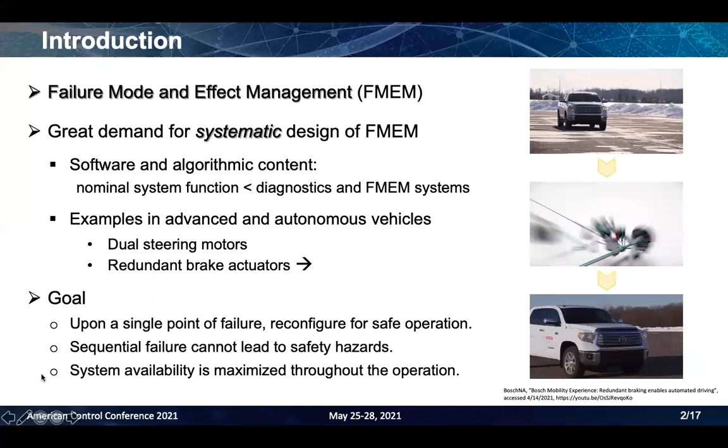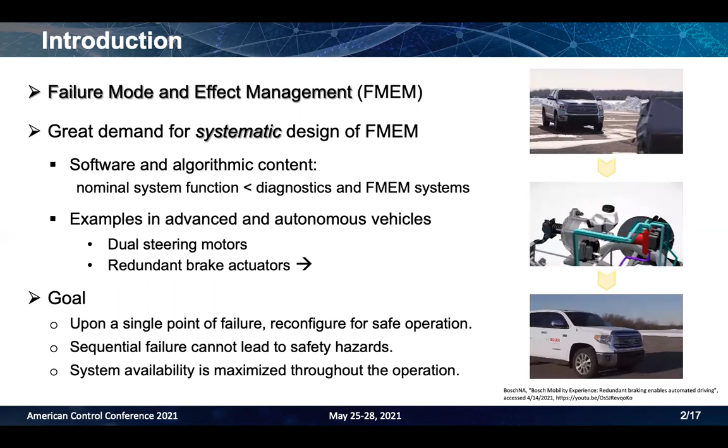The title of our presentation today is A Failure Mode Reconfiguration Strategy Based on Constraint Admissible and Recoverable Sets. Our study focused on the design of failure mode and effect management systems for industrial applications. There's great demand for systematic design approaches in this area, as the software and algorithmic content for diagnostics and the FMEM system is often larger than what is responsible for the nominal system function.

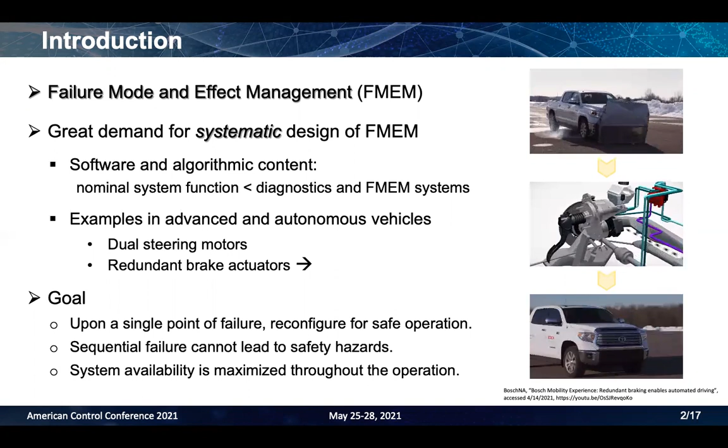This is notably the case in the area of advanced and autonomous vehicles, where redundant actuation is often employed to enable safe operation in case of failures. Examples include having dual steering motors and the use of redundant brake actuators, as shown by these videos. So our goal for the design of the FMEM system is that in case of a single point of failure, the system operation can be reconfigured so that in a new mode, another single point of failure cannot lead to safety hazards, and at the same time, we're maximizing the system availability.

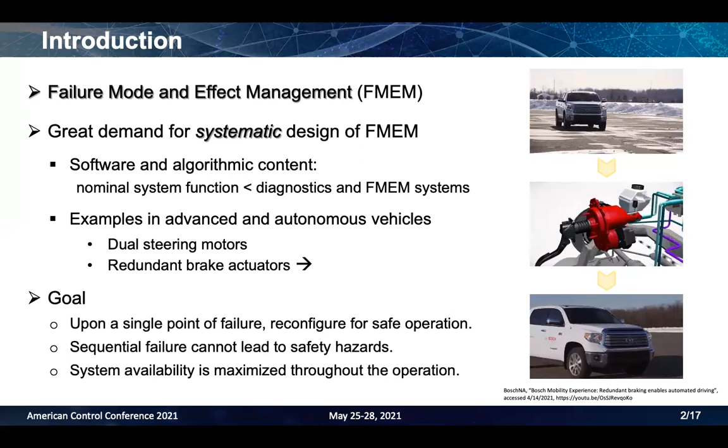Systematic recoverability analysis has been addressed in previous literature, but the existing methods typically do not handle state and control constraints. Set theoretic control methods have been used to handle constraints, so our approach builds on the idea of using constraint admissible and recoverable sets while extending it to cases with multiple failure modes and sequential mode transitions.

We consider failures caused by an actuator being zeroed out, and the goal is to guarantee safe operation and reconfiguration of the system, which means to avoid the violation of state and control constraints at all times. Last but not least, our approach includes the important feature of reference tracking while maintaining the safe operation of the system by using the reference governor.

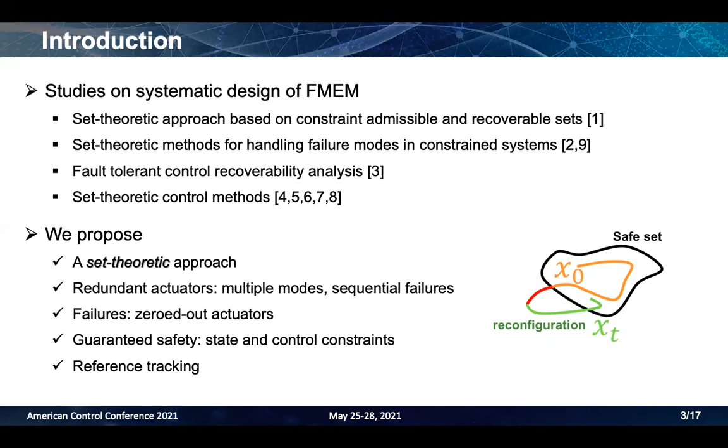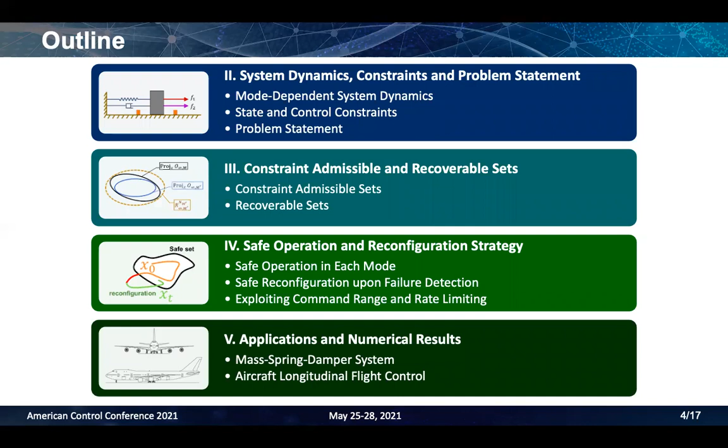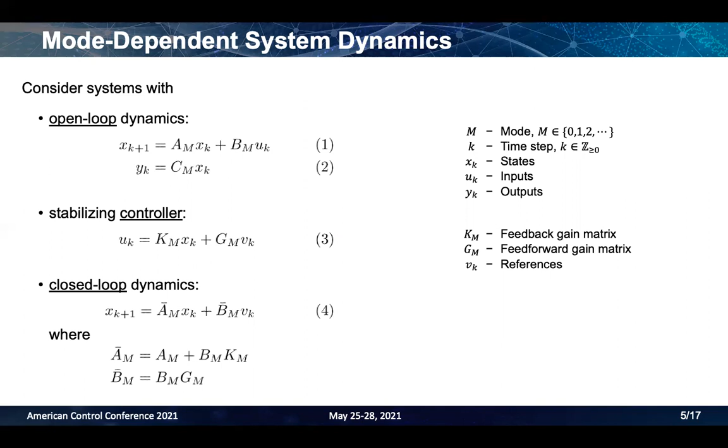The set of point-wise in time state constraints are given in equation 5 as a finite set of inequalities, which represent state and control constraints, as well as actuator range and rate limits. Modifications to these constraints are considered to facilitate the subsequent design of our failure mode reconfiguration approach. Firstly, to satisfy subsequent conditions for failure mode reconfiguration, it might be necessary to artificially tighten the constraints as given by equation 6, where the set X bar needs to be appropriately designed.

Secondly, some of the state constraints are imposed conservatively in normal conditions to extend the system operating life. They may be able to be relaxed temporarily during the reconfiguration, as shown by equation 7, where XRM should also be properly designed.

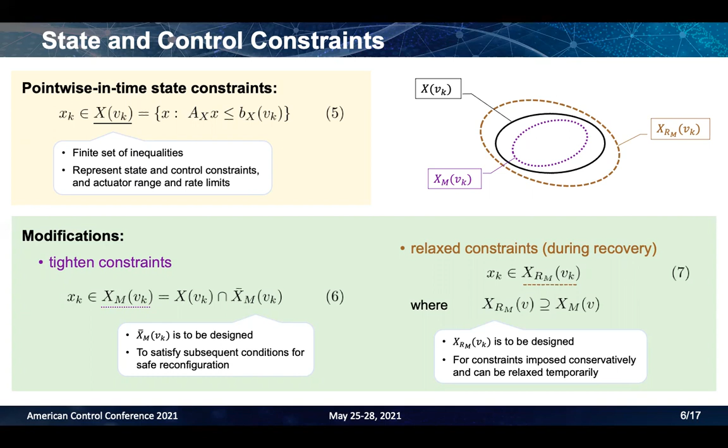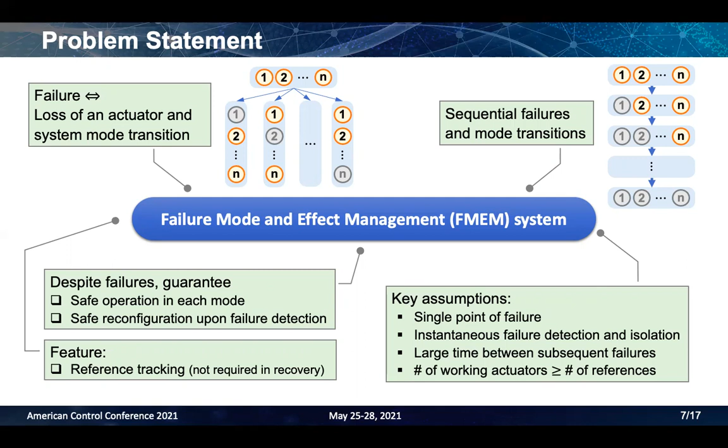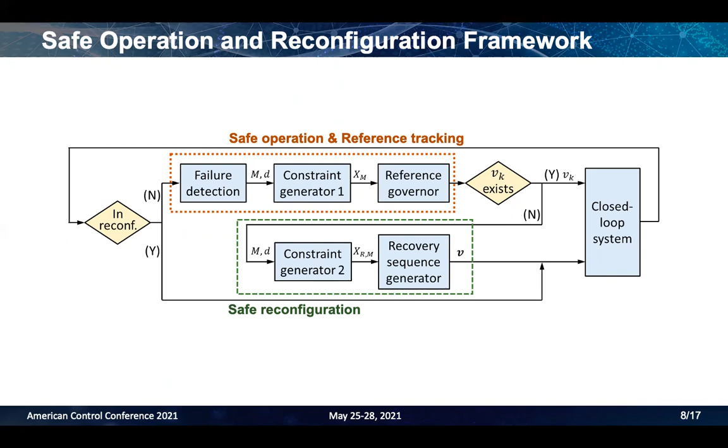Here's the framework of the safe operation and reconfiguration strategy. During safe operation, the system runs the upper part of the loop and performs reference tracking using the reference governor. Once the failure is detected and isolated, if reconfiguration is necessary, the recovery sequence generator will generate a command sequence and the system will run with the sequence until the reconfiguration is finished.

Before further discussion of the strategy, we first need to define the constraint admissible and recoverable sets. The constraint admissible set is a set of constant reference commands v and initial states x0 such that the constraints are satisfied for all future time. The constraint admissible set defined by equation 8 has two nice properties: it is finitely determined, as given by equation 9, and it's an invariant set.

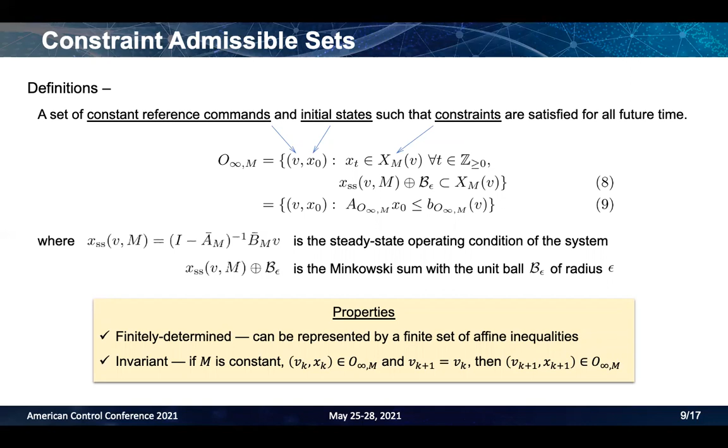The recoverable set is a set of initial states x0 such that there exists a recovery sequence from V0 to Vnm-1 to steer the state into the projection of O infinity m within a certain number of steps Nm, while satisfying safety constraints during the reconfiguration.

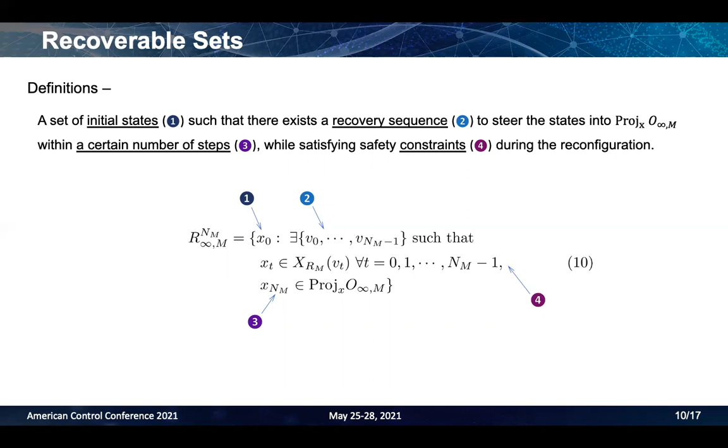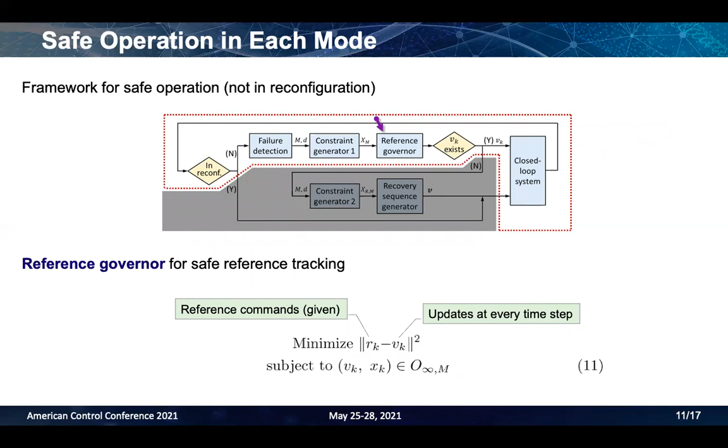Now back to the safe operation and reconfiguration strategy. During the operation in each mode, the reference governor is applied. So the reference command is given by RK, while the modified command VK is updated at every time step by solving the optimization problem given by equation 11. When a failure is detected and isolated, if reconfiguration is necessary, the recovery sequence generator will generate a command sequence by solving a quadratic programming problem.

The safe reconfiguration condition is given by equation 12, where we need the projection of the constraint admissible set of mode M to be a subset of the recoverable set of its successor mode M prime. Three mechanisms can be used to satisfy this condition. We could tighten the constraints of the preceding mode, relax the constraints of the successor mode during the reconfiguration, and allow more steps for the reconfiguration.

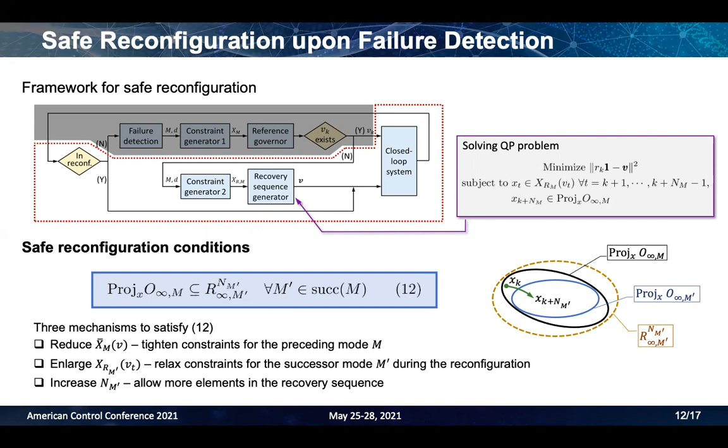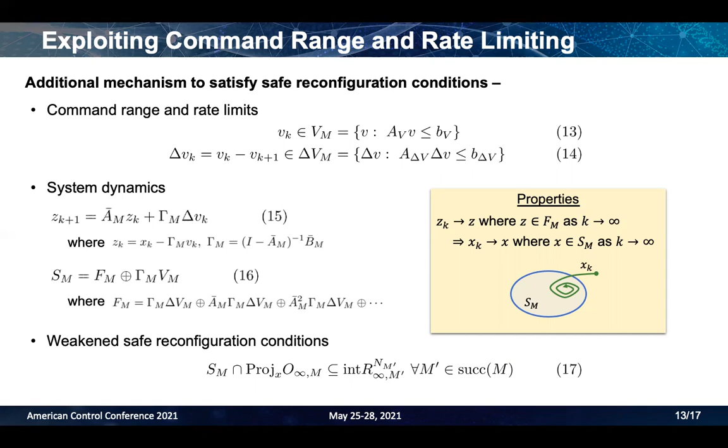Now let's see two applications with numerical results. The first example is for a mass spring damper system with two redundant forces acting on the mass, and it's trying to track some given displacement. The dynamics, constraints, and definition of modes are shown on the left. The design process begins from mode 3, where both actuators have failed, and ends with mode 0, the mode for normal operation.

We consider two study cases. The first case is without command range and rate limiting, where we need to apply the mechanism of tightening the constraints in modes 1 and 2. The second case is with command range and rate limiting. We can see that in either case, reconfigurations are successful when failure happens. The constraints are satisfied throughout the simulation, and in case 2, the effect of command rate limiting is visible.

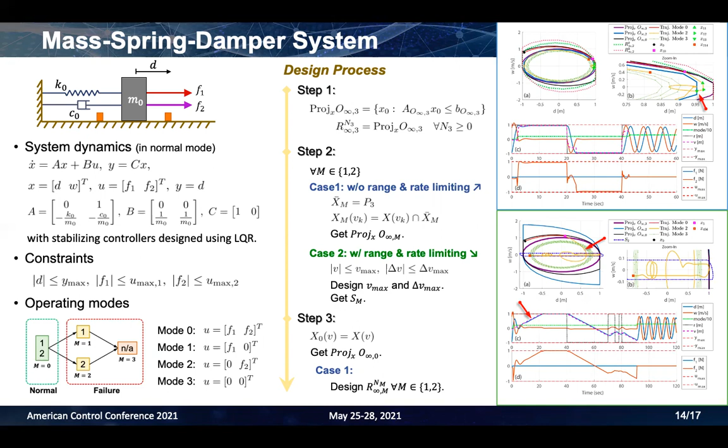The second example is for the Boeing 747 longitudinal flight control. Again, the dynamics, constraints, and definition of modes are shown on the left. The design is similar to case 1 in the mass spring damper example, except notice that if we only change the steps allowed for recovery, the change to the recoverable set is very limited. In order to satisfy the safe reconfiguration condition, we can tighten the constraints of the preceding mode and relax the constraints of the successor mode during the recovery. The simulation result shows that there is no constraint violation during operation and reconfiguration.

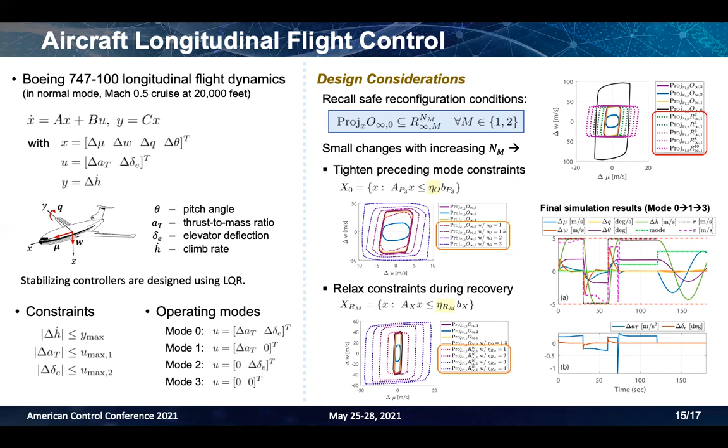To conclude this presentation, we propose a systematic approach to failure mode and effect management system design based on constraint admissible and recoverable sets to handle systems with multiple modes and sequential actuator failures, as well as state and control constraints and the need for reference tracking. Future work includes developing comprehensive numerical procedures and studying cases when failure detection is either incomplete or unavailable.

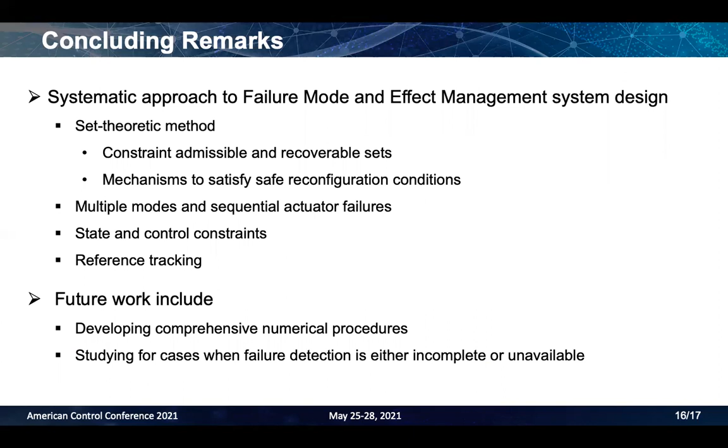We hope this presentation can give you a taste of the flavor of the ingredients of our set theoretic approach. For more details of the strategy, please refer to our paper.